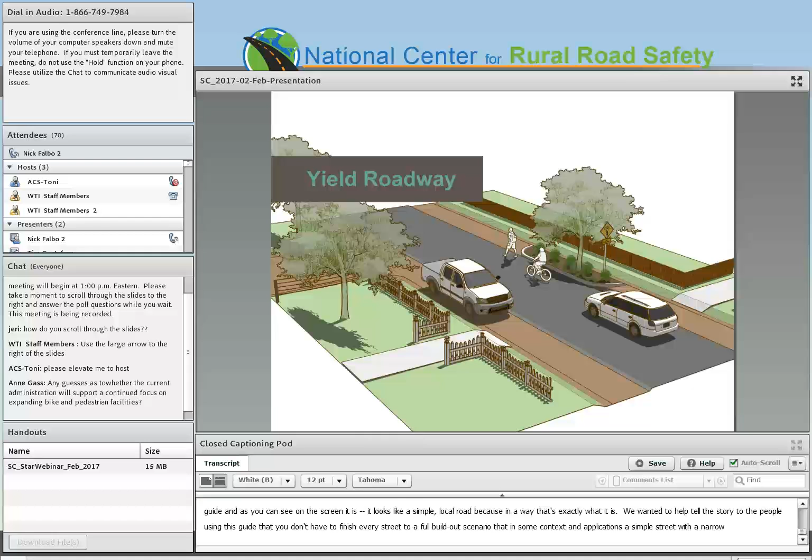The yield roadway treatment is the first mixed traffic facility in the guide, and as you can see on the screen, it looks just like a very simple local road, because in a way that's exactly what it is. We really wanted to help tell the story to the people using this guide that you don't have to finish every street to a full build-out scenario. In some contexts and applications, a simple street with just a narrow paved area can actually work great even for people walking and people biking. You don't always need a sidewalk.

So we paint a picture of this roadway type where you have a narrow two-way travel area that's paved. This is where people walk, this is where people bike, this is where people drive, and they do so politely, negotiating the space. Generally, it's in a residential context, and it's surrounded by an unpaved roadside; no sidewalk or other separated facility is provided.

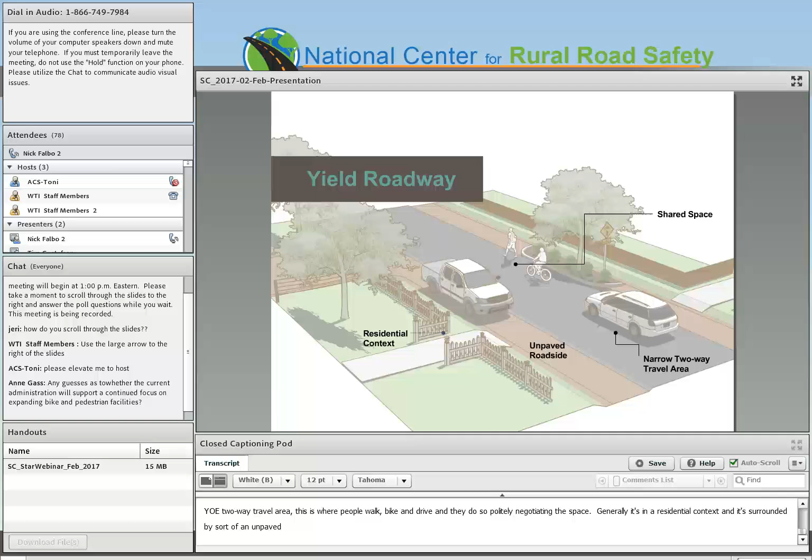Same thing for speeds. We want to be operating at very low speeds. This is going to be pedestrian and bicycle compatible speeds, preferably less than 20 miles an hour. On the network, really we're focused on local links. This is not going to be the type of treatment you can put on a collector street or an arterial street. It is more local access focused street connections.

And generally it's going to be in a built up area where you've got maybe residential uses and people will be walking to do errands or visit other people or just to get out of the house. The guidance itself provides some information on signage to indicate the sort of potential for pedestrians to be on the road. It provides guidance on yield operations.

Narrow paved surfaces and yield roadways are pretty common in many residential neighborhoods where the space is constrained enough that 2 cars traveling in opposite directions actually have to yield to one another and negotiate that space. And we have an example here. Our case study in the guide is from Manzanita, Oregon, where their local street standards don't include sidewalks. It's just a simple 18-foot paved surface. It's got a 2-foot valley gutter to accommodate drainage, and then they allow parking on the street and creates a very compact, comfortable space for walking, biking, and driving.

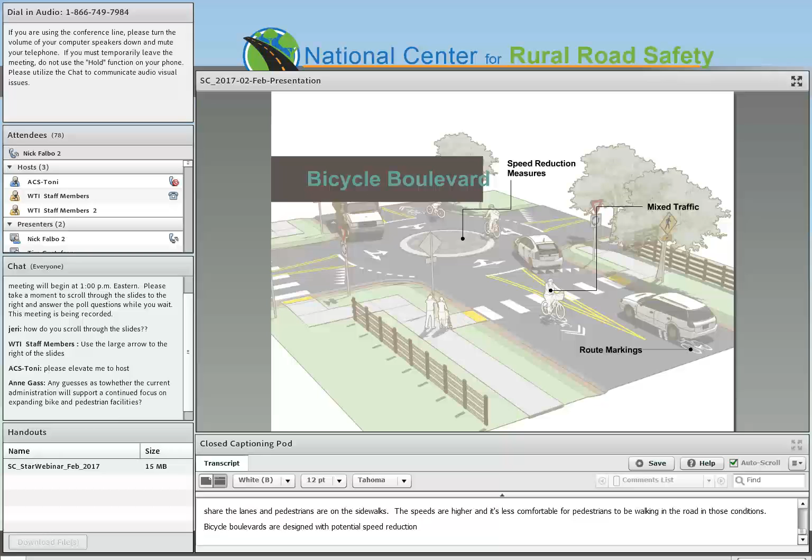The volumes and the speeds, as you'll see, are operating at a higher range, and it's less comfortable for pedestrians to be walking in the road in those conditions. Bicycle boulevards are designed with potentially speed reduction measures, some sort of traffic calming to maintain a bicycle-compatible speed. You've got mixed traffic operation with bicyclists and motor vehicles sharing the lane, and then generally signing and marking to identify the route and make it very clear to everyone who's using it that this is a place where bicyclists are expected. So you can see the volume and the speed ranges increase slightly over the last treatment.

In general, you want your volumes below 3,000 cars a day, and you want your speeds 25 miles an hour or below. In many small town communities, volumes really aren't the issue for bicycle boulevard implementation. You might have a small town whose entire population is 3,000 people, and so achieving less than 3,000 cars a day is not challenging. It's really about speed management to try to create bicycle-compatible speeds.

As far as network links, bike boulevards tend to operate on local roadways, often as an alternative to an alignment along a busier street. So if you've got a connected network in your community or some degree of connectivity that lets you use an alignment along a local street to serve the transportation needs of your community, then you can maybe think of a bike boulevard as a solution. And then the land use for bike boulevards is in built-up areas where you've got sort of origins and destinations and activity.

You can see on this diagram of the bike boulevard sort of the heavy application of potential traffic calming devices. The guide does talk about traffic calming and the strategies that maybe are most appropriate in rural areas, areas that don't have a curb and gutter. But we illustrate both access management, speed management, and other traffic calming devices.

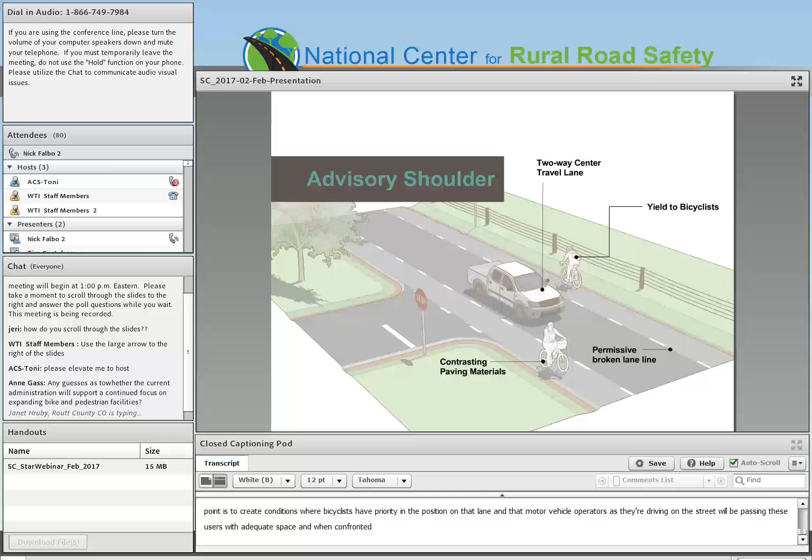The point here is to try to create conditions where bicyclists have priority in the position on that lane, and that motor vehicle operators, as they're driving on the street, will be passing these users with adequate space, and when confronted with a need to negotiate that space, will yield to the bicyclists when needed.

We do have a pretty heavy disclaimer on the front of this treatment because it's still experimental. The advisory shoulders are a new treatment type in the United States. No performance data has yet been collected to compare to a substantial body of international experience. In order to install advisory shoulders, an approved request to experiment is required as detailed in Section 1A.10 of the MUTCD. And they are accepting requests for experimentation on a similar treatment right now called dashed bicycle lanes. So that's already being experimented with, and we continue to learn more about this facility type every day.

Advisory shoulders can be designed to work on roads with even higher speeds and volumes than bicycle boulevards. We recommend them on streets at 3,000 cars a day or less, although there's some indication that they can operate sufficiently above that, up to 6,000 cars per day. And then they can operate as well on higher speeds, assuming you've got good sight lines and visibility. The type of interactions with oncoming vehicles requires that drivers be able to see oncoming vehicles soon enough in order to pull to the side and interact with them.

As far as the network connection, this works best on collector streets and maybe some minor arterial streets. And then land uses, this is an appropriate facility type that works both in built-up areas as well as outside of built-up areas, as long as you meet those speed and volume requirements.

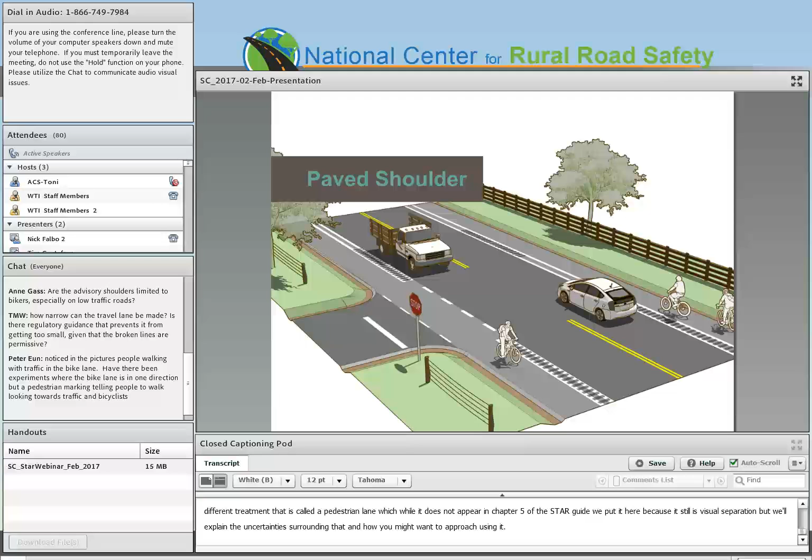So the first one that we want to get into is the paved shoulder. The paved shoulder is nothing necessarily new, but the reason we wanted to expand on it here in the guide is to help explain the benefits that it can provide in these rural environments.

And as you can see here by the diagram that shows what it consists of, the paved shoulder provides you a little bit of additional width on the edge of a roadway, usually with an open drainage system, no curb and gutter. It has very visually apparent striping on the edge of it, so you understand where the edge of the roadway is. And sometimes this shoulder can contain a contrasting pavement material so as to differentiate it from the traveled way. And then the last element that you see on this page, which I will get into in just a little bit, is the location of the rumble strips.

And I've given presentations on this topic before, and I know that there are some questions surrounding the use of rumble strips and what their application is intended for. So I will talk a little bit about how some communities are hesitant to use them for noise purposes, but how you can address that if that is something that you're considering with your paved shoulder.

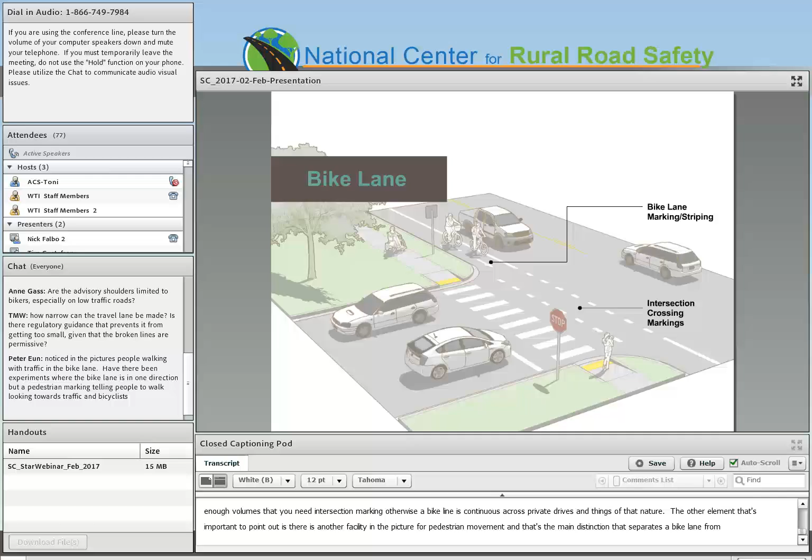Regarding placement, in the traffic placement, you can see that this is intended for higher speed and higher volume environments. It does have potential in some of those lower environments, but I would say that there is a need for greater physical separation on the upper end of the spectrum, as Nick mentioned.

So if you have a desire to place a bike lane on some of those higher speed, higher volume roadways, that additional separation, that additional buffer may be necessary in order to provide it. And that's because these are intended for your collectors and your arterials, as we mentioned. And from a land use context, these can be provided in built-up areas as well as outside of them.

So as I mentioned, a bike lane is designating exclusive space for the use of bicyclists through the use of pavement markings and regulatory signage, which is optional. But the minimum requirement is the pavement marking and the designation that it's exclusive use.

A bike lane is located directly adjacent to the motor vehicle travel lane and is the same direction as the motorized travel lane. So it's important to make it clear that a bike lane travels in the same direction as automobile traffic, and that there are other treatments that help you to differentiate if you want bidirectional or contraflow travel.

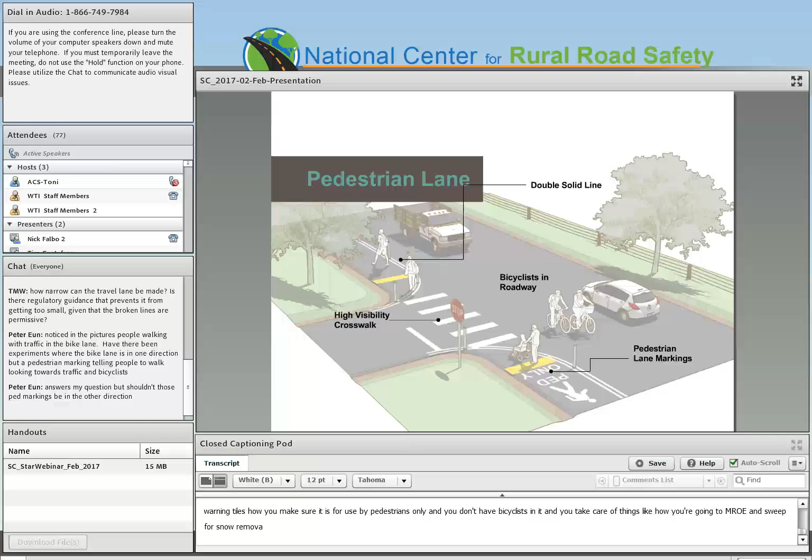I apologize for the misnomer here on the header, but as far as traffic, these are still intended for low-speed, low-volume environments, fewer than 2,000 vehicles per day, 20 miles per hour of speed. These can provide links in a variety of network contexts. You can do this on local roadways or your collectors, but generally not intended for arterials or higher speed, higher volume, because again, you're going to want that greater separation from moving traffic.

These are definitely recommended for built-up areas where you anticipate that there will be enough pedestrian traffic to make this facility necessary, and so that is one thing that you want to consider. As I mentioned, this is treated as an interim or temporary pedestrian facility, and the guidance is not yet very clear on what interim and what temporary means. There's no determination on length or time duration for how long something like this should be installed, but it's intended to address a specific need where there is a high level of pedestrian traffic or an anticipation thereof, and there's a need to accommodate them.

So sometimes you want to supplement this with some signage. We've shown the on-roadway warning sign here in this image, and there's some minimum width requirements and pavement marking requirements to make it very clear that this is intended for pedestrian traffic.

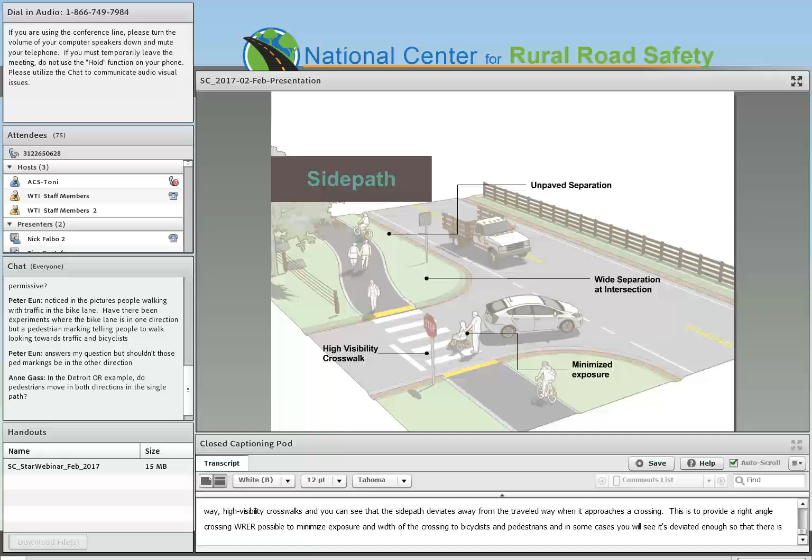In this situation, you have much wider application in speed and volume context. That's because the separation is quite great. You can see that side paths are typically installed along arterials and collectors, and that they can be used inside of and outside of built-up areas. Now, I did stress earlier that this is a two-way facility, that it's located immediately adjacent to a roadway, and it provides a higher quality facility because of that separation. And so the guide has some diagrams to help clarify what kind of separation and how much you need for each of these types of separations.

So you can see that you can do that with an open drainage swale, a grass buffer that needs to be at least 5 feet in width. If you are doing less than 5 feet, you do need some sort of a physical barrier, and you must take care to make sure that that barrier is still outside of the clear zone for the traveled way. I received questions about this, that you do still need to make sure this kind of barrier is still outside of that clear zone for the traveled way. Or you can do what is done similar to how the shoulders were treated, where you can do a separation with the use of rumble strips.

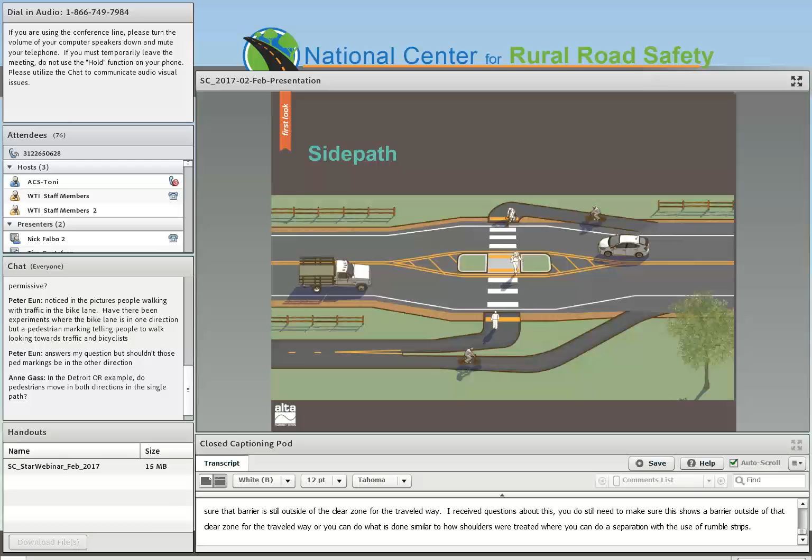When side paths are crossing facilities, you do want to take care to make clear how that separation is done and where those crossings happen. So there's guidance in there for treatment on how to cross facilities, what you might need to do for bicycle and pedestrian traffic.

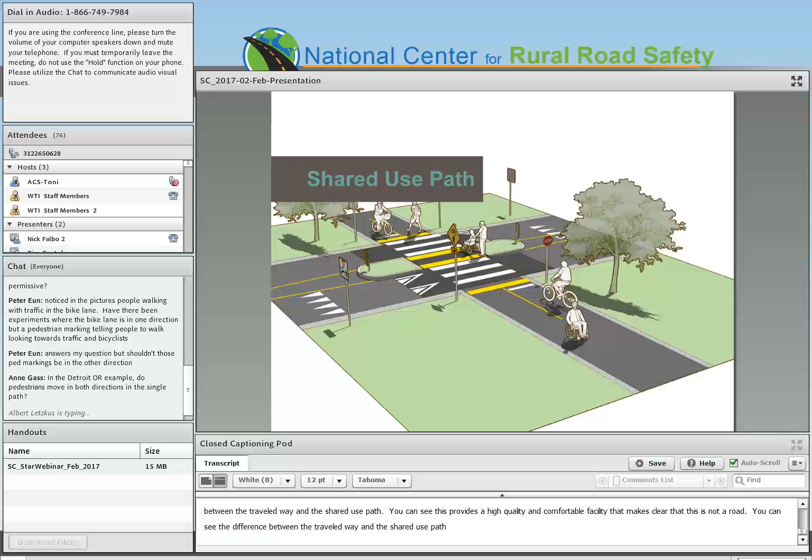We've moved on to the next facility. The shared use path is a new facility, and this one is entirely outside of the right-of-way, and that's what makes it different than the side path. So what's important to note here is how it interacts with roadways when it's crossing the roadway, because it's entirely separated from roadways until there's a crossing.

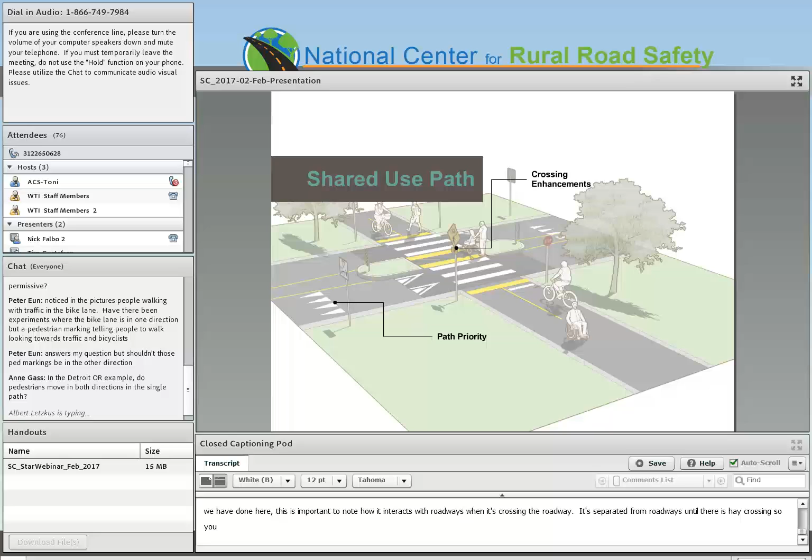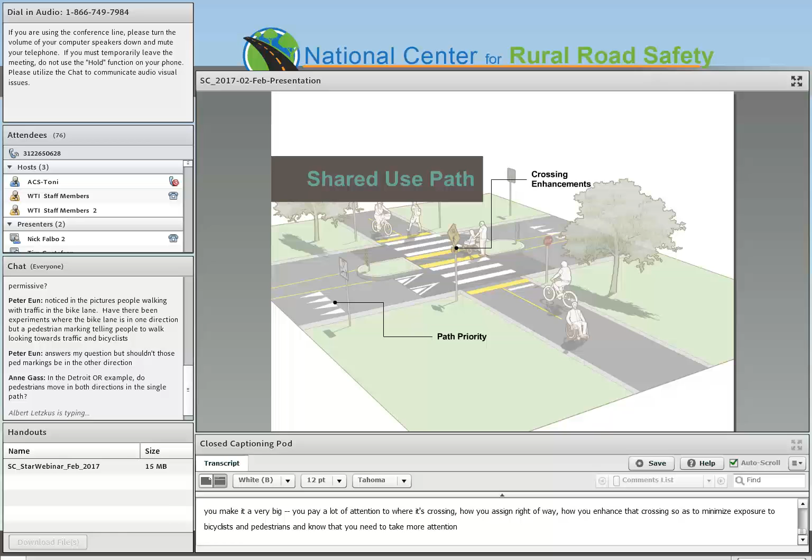So you pay a lot of attention to where it's crossing, how you assign right-of-way, how you enhance that crossing so as to minimize the exposure to bicyclists and pedestrians, and know that you need to take a little bit more attention at the crossings so that the shared use path can be as comfortable and as desirable as it is during the full length.

Slightly modified guidance here because since this is not within a roadway context, it's all about considering how it interacts when it crosses that facility. So as you can see here, it's relatively comfortable in low to moderate speeds and volumes, but there might be some concern if you're going to very high speed environments. Some extra care may need to be taken when you're making those crossings.

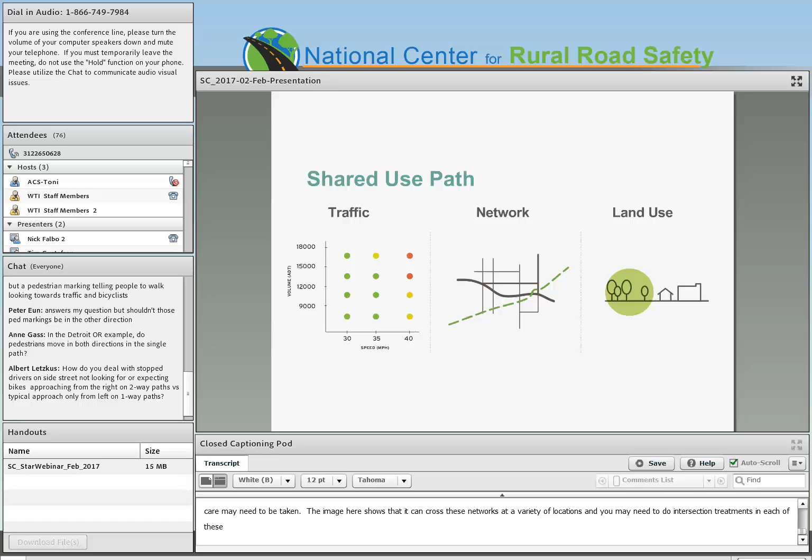The image here showing the network shows that it can cross these roadway networks at a variety of locations, and so you may need to do a little bit of intersection treatments in each of these cases, particularly because the shared use path spends most of its time outside of built-up areas.

Here's the guidance that you can see in the guide. It's intended to be used by all roadway users, and there is more attention paid in the guide here to how you are crossing your roadways. There's a lot of treatments that have come about in recent years that help to really elevate the visibility at crossings and to change the amount of detection and right-of-way warning and traffic control that happens at these locations.

So the guide gets into more about the crossings for shared use paths, because this is where we felt, and the FHWA felt, good guidance at the crossings can help elevate these from their design that people are familiar with to what additional guidance has come out recently.

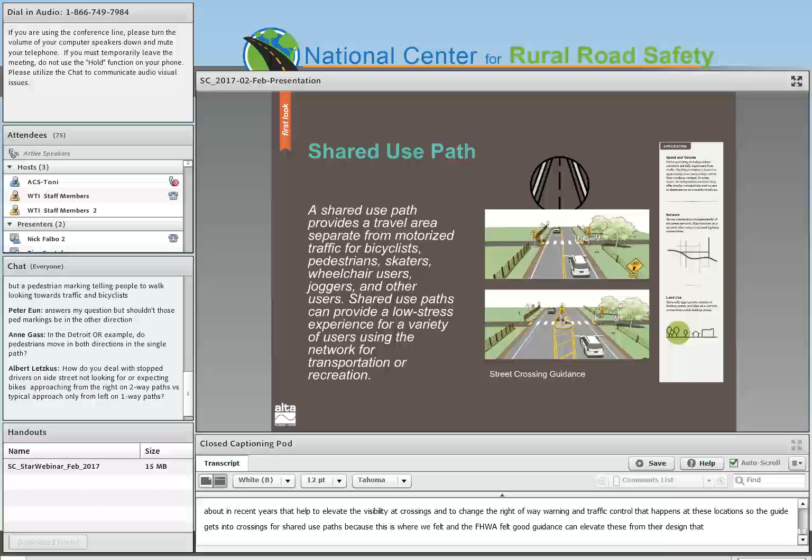Here you can see a high-intensity activated crosswalk beacon at a crossing in Bentonville, Arkansas. It's an otherwise very comfortable facility, but they wanted to take a little bit extra time here to show how much attention needs to be paid at the crossings to warn approaching motorists that the trail is here, and this one automatically detects the presence of bicyclists and pedestrians so that they know when traffic has been stopped in opposing directions and that they can proceed.

The second to last treatment that I want to talk about is the sidewalk. Again, the sidewalk is not necessarily new or innovative, but the application that it has in this guide was interesting to help make sure that it's not perceived as something that's too urban. I think that's really what the attention paid here is. This sidewalk shows that it is separated from the traveled way by an unpaved section.

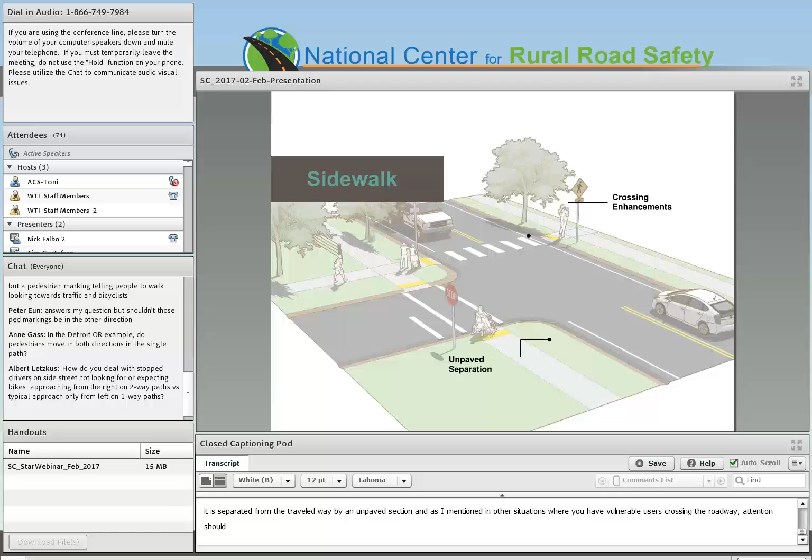And again, as I mentioned, in other situations where you have vulnerable users crossing the roadway, attention should be paid where sidewalks meet crossing treatments. So high visibility crosswalks are important. Sidewalks have application in a wide variety of traffic and network contexts. These definitely are things that you want to pay attention to in your built-up environments because, again, you have the presence of pedestrian traffic such that a facility of this type is needed.

And as I mentioned, I think in some contexts, sidewalks may be perceived as too urban, but the reason they're included here is because they provide dedicated space intended for use by pedestrians that's safe, comfortable, and I think the greatest key is the accessibility part.

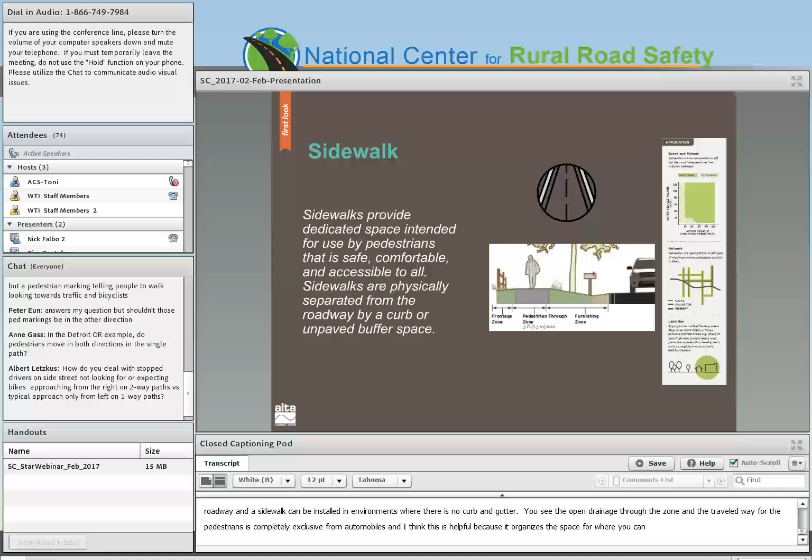They're physically separated from the roadway, and a sidewalk can be installed even in environments where there is no curb and gutter. You see here the image shows the open drainage through the furnishing and through zone, and that the traveled way for the pedestrians is completely exclusive from automobiles. And I think this is helpful too because it helps organize the space for where you can see parkway trees, mailboxes, and things of that nature in an environment that's not necessarily perceived as urban.

And these may be necessary because you have small town environments that come to a downtown or a town center, and there is a need to have some sidewalk treatment. So here's an example from Denmark, South Carolina. Another feature you might enjoy seeing here is that there is some rain garden treatment on an open drainage environment alongside the roadway. This shows that you can have your sidewalk and your drainage and your landscaping in some otherwise perceived as constrained environments. And I wouldn't necessarily say that this is a very urban context.

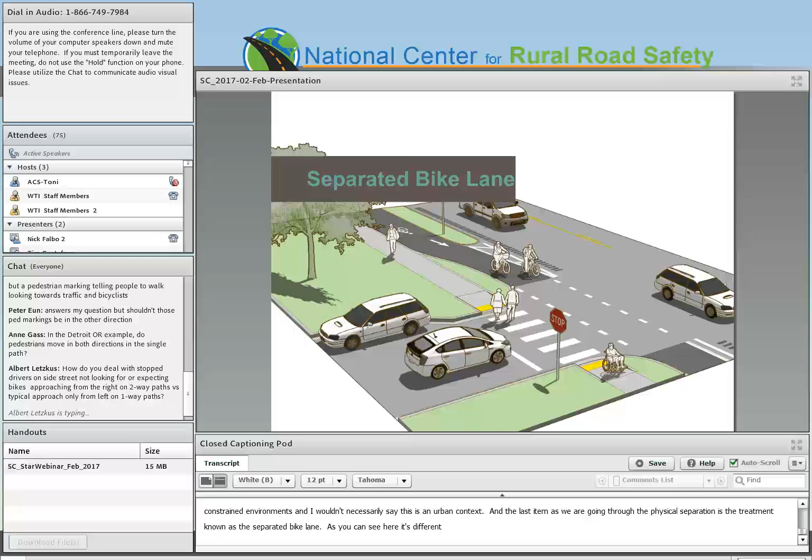And the last item as we're going through the physical separation is the treatment known as the separated bike lane. Now the separated bike lane, as you can see here, is different from the traveled way. It is different from the sidewalk. It is its own facility that is separated from both of these features in the roadway. And we wanted to spend a little time explaining what makes this different than some of the other treatments you've seen here. So as you can see here, there is a separation from bicycles and pedestrians, as well as a separation from bicyclists and automobile traffic.

You can do this through the use of the open grass areas as shown there. This is done also to provide that sight distance between the various users so that users can see each other. There needs to be enough separation. It bends back toward the roadway so as to bend away from the high visibility crosswalk at this intersection. And the various pavement markings that you can see, the dash markings across the intersection, and how it interacts with the roadway as well as the sidewalk.

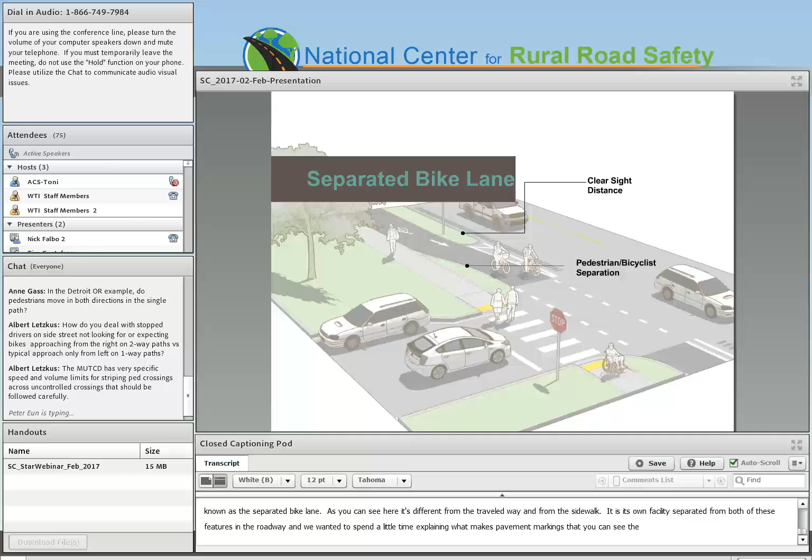Separated bike lanes have utility, again, in a wide variety of traffic and speed environments. The higher volume, higher speed environments are suitable, but again, we stress the importance of with greater speed comes a need for greater separation. So that is something that you want to think about when implementing separated bike lanes or even planning for them. They're best suited on your collector roadways where there is a need to separate the users of each mode and each type based on their speed differential.

And these have application in your more built-up environments, and something like a separated bike lane may transition to a side path or a paved shoulder once you get back out. So that's the other thing that I think this guide helps to consider, is how to change that facility as you change the land use context.

This is intended for exclusive use by bicyclists, so you'll typically see it on roadways where there is traveled way and also a facility for pedestrians. And that's why it's important to consider that. It is adjacent to the roadway, and there is usually some vertical element that helps delineate the difference between the separated bike lane and the traveled lane.

So here you can see a couple of different ways that you can treat it. You can do so with the open landscape area. You can show it with or without curb and gutter as long as you're taking drainage into consideration. You can see it alongside of a pedestrian facility or show a pedestrian facility elsewhere. And then you could even show some sort of a curb-type barrier that separates the traveled lane and separated bike lane.

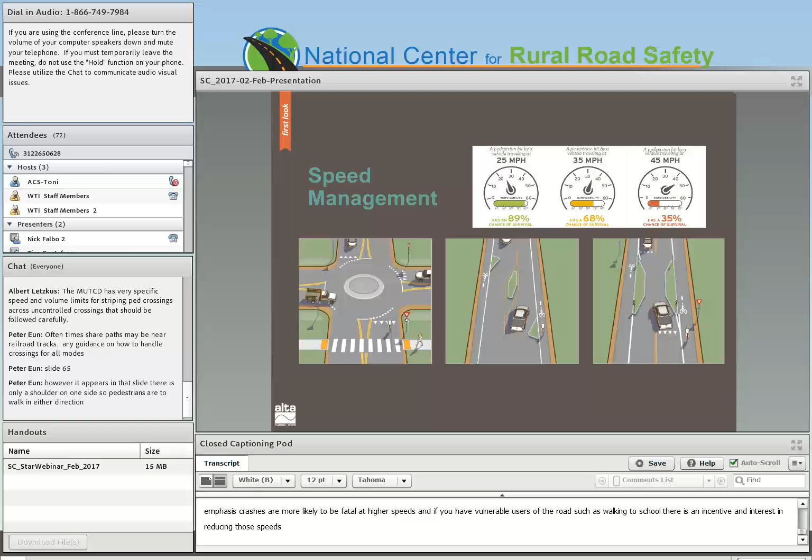And this helps to emphasize that crashes are much more severe and more likely to be fatal at higher speeds. And if you have vulnerable roadway users such as bicyclists, pedestrians, people walking to school, there is an incentive and definitely an interest in helping to reduce those speeds. And I think that rural environments have just as much of an interest, if not more, in doing so in key locations. As I mentioned, school connections might be an area where you want to apply a little bit more design treatments than you would otherwise outside of that environment.

And I think this helps to touch on, you don't necessarily feel that a sidewalk may be needed during an entire length of a facility, but there may be an interest, especially if you know of the school travel area, to provide sidewalks or other facilities in the vicinity of that school because you know that the volumes are higher, the need to mitigate conflicts is higher, and the need to separate those conflicts is higher. So it's important to think about school connections as these destinations where a little bit more attention is warranted.

Another thing that the guide provides is some guidance on how you can retrofit or conceive new multimodal main streets for small towns and rural environments. And I think that this is interesting because there's guidance that you can follow and look at some ideas on how to treat roadways that are 2 lanes, 3 lanes, 4 lanes, and in some cases even 5 lanes wide. When you have a multi-lane highway that comes into a downtown environment, the speeds come way down, but the cross-section remains about the same. And so the guide gives a little bit of guidance on how to go about rearranging the users in that space and guidance for how you can do so on these different streets.

As I mentioned, bridges are a particular point of concern in rural environments and small towns because while you may have an otherwise comfortable facility along a roadway, you may have adequate right-of-way to provide the space for the users that you wish to accommodate. Sometimes when you get to a bridge, that becomes a very constrained environment, and the challenges go up because this is an area where if facilities cannot be provided, this area continues to be a gap in the network. And so the guide provides a little bit of information on how to separate different users as you approach and use the bridge. Whose movement do you prioritize when making crossings of that? How do you make different users aware of the presence of others, making sure that that facility and that network can continue to be connected?

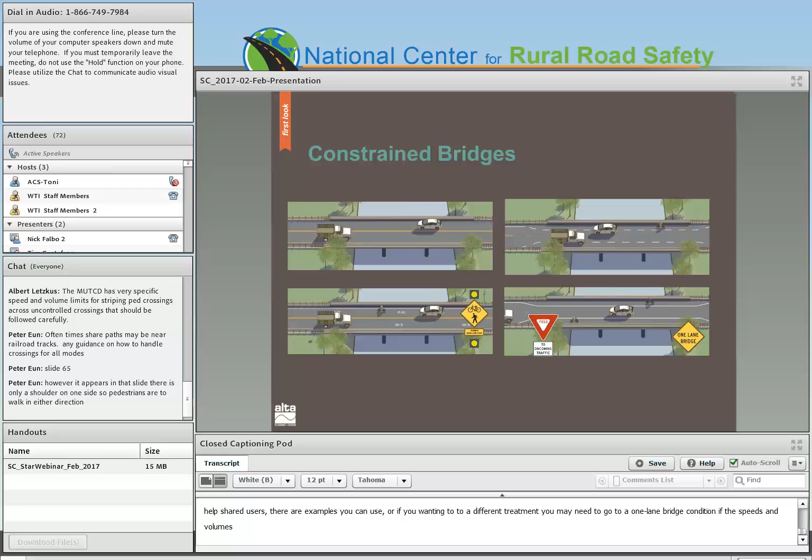And near lastly, I would say that access to public lands is something that is worth considering in these environments. This is important because in rural and small town environments, there may be a need to accommodate active transportation users who are interested in hiking or walking out to a natural resource environment. And by providing that connectivity, that provides that ability for tourism.